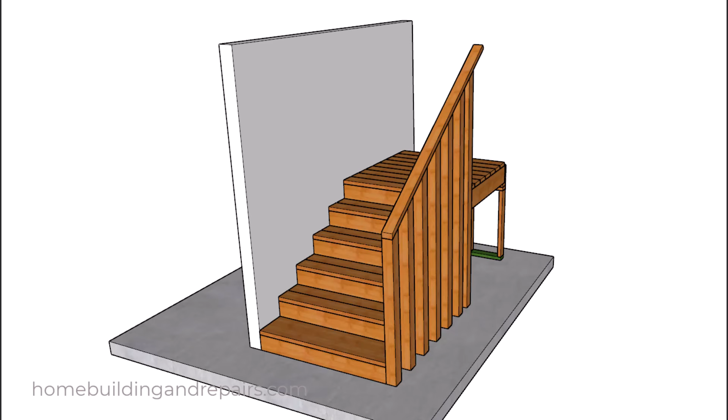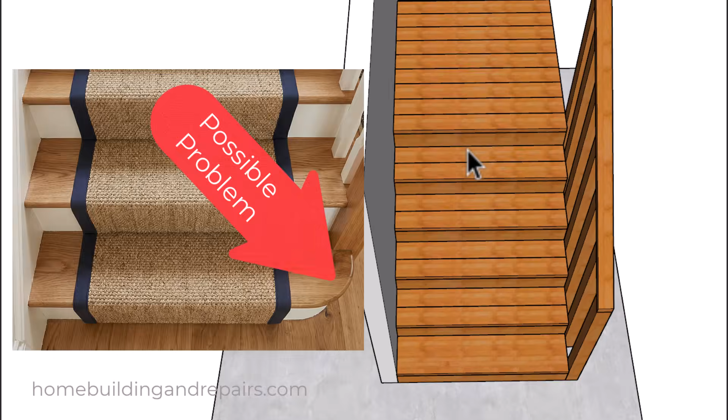In this video, we are going to be talking about putting a radius step in at the bottom, and we will get started by telling you that all of the treads and risers need to be the exact same size, or at the most 3/8 of an inch. Maximum variations are allowed in the depth of the tread and the height of the riser, which means something like this probably isn't going to work.

However, I would check with your local building authorities to verify whether or not they will allow it, because this right here does create more than a 3/8 of an inch variation at the corner here. And you're probably saying, hey, what's the big deal? No one's ever going to step here anyway. And you could be right.

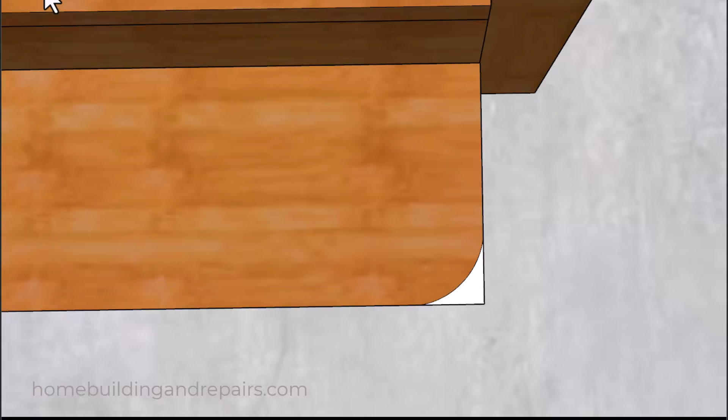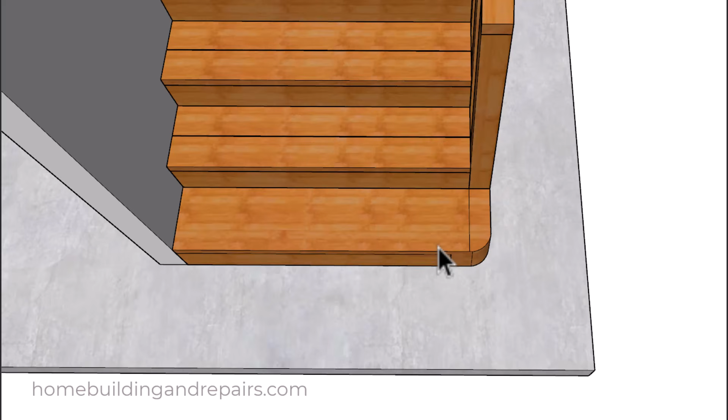I am not here to tell you that something like this will ever create a safety problem, because it is not extending past what I would consider to be the edge of the stairway. However, if you do have a radius or curve that would be extended past the side or edge of a flight of stairs, then you might not have a problem. And I've seen this done plenty of times. And if that doesn't make sense, here's another example.

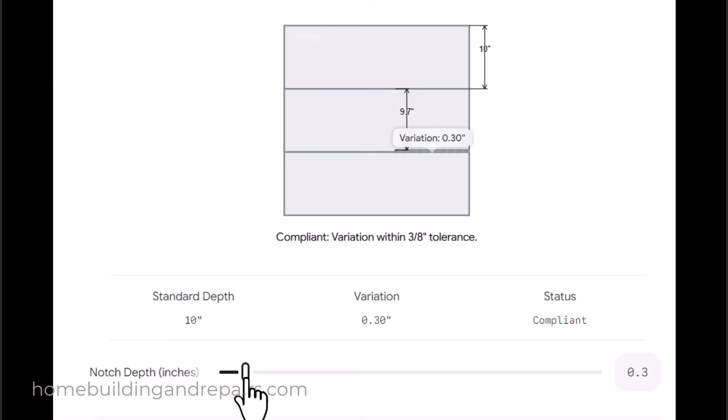So we have a 10-inch tread and a 10-inch tread here, the depth. Now I'm going to move it just a little bit. Still not a problem. If I move it a little more, remember I need 3/8 of an inch to be a problem. And as a decimal, that I believe is 0.375. I move it one more time. Now I have a problem. It's more than 0.375. And this is the section you cannot remove.

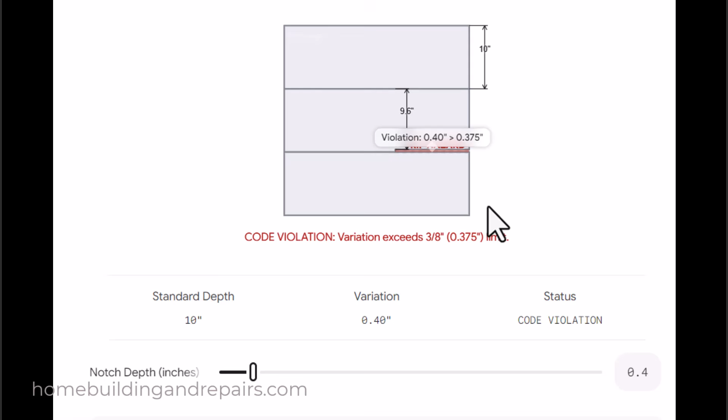I cannot remove a section out of a stairway. I can't remove it out of the bottom step here. I can't put a radius in here because it's going to create a variance problem. So again, most of the time I'm going to be able to extend past it, but I'm not going to be able to remove a section of it.